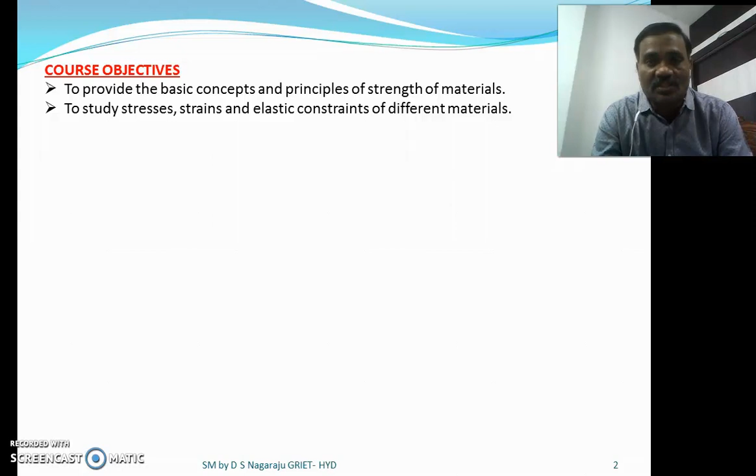That means the concept of stress, strain and elastic constants we are going to see for different materials. Each material has its own mechanical properties. So in strength of materials we mainly deal with the mechanical properties of materials.

If you apply a force or load on any component or material, we study what changes occur and what happens to that component. That is mainly related to stresses, strains and the constants related to the materials.

Third objective: to gain knowledge about shear stress and bending moment of different beams subjected to various loads. So if you go through the second unit of the subject, we are going to see the beams.

What are the types of beams and what types of loads you apply, and after application of the load what happens to the beam, at each point what is the shear stress and bending moment for different beams and different loads we are going to study. That is the objective - studying stress, strains, shear stress and bending moment for beams.

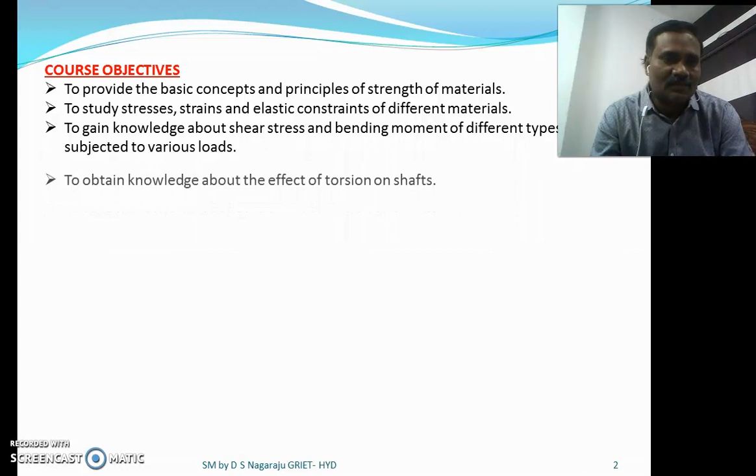Fourth one: to obtain knowledge about the effect of torsion on shafts. Stress strain is the basic terminology in the first unit, and types of beams and application of different types of loads.

We are going to do shear stress and bending moment diagrams in the second unit. The fourth objective is the effect of torsion - what is torsion, and if you apply a twisting or turning moment to the shaft, what happens and what effect you get.

The fifth one is to understand the flexural and shear stress concepts for different materials and shapes of structures. That means you are applying a load on a beam, and the beam section can have different sections.

The section may be an I section or T section. Each layer of the section has flexural stress, which is nothing but bending stress, and shear stress also. We are going to analyze the shear stress and bending stresses for different sections of the structures.

So that is the course objectives - I have framed my syllabus of strength of materials in such a manner that I am going to give all these basic concepts. That is the objectives. Now what are the outcomes?

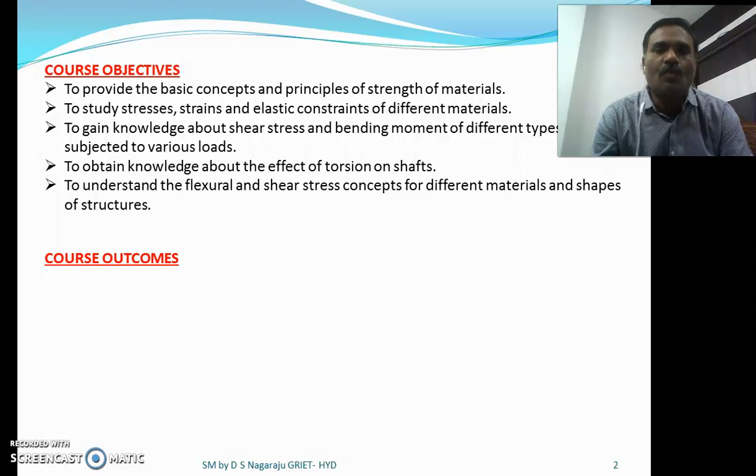As a student, after completion of the syllabus, what you are going to gain or the knowledge you gain is nothing but the course outcomes.

At the end of the course, the student shall be able to understand the theory of elasticity, including strain displacement and Hooke's law relationships; analyze the shear stress and bending moment diagrams with various types of loads; and calculate the slope and deflection of the beam subjected to transverse load - that is also related to beams.

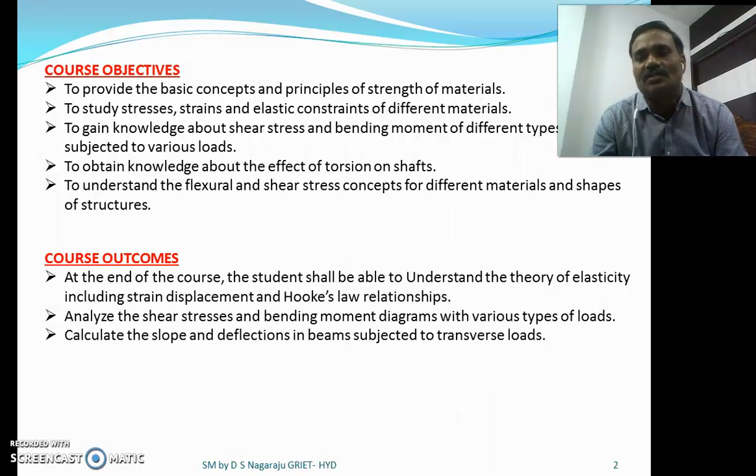Not only shear stress and bending moment, but also we are going to see slope and deflection. You are going to calculate that one.

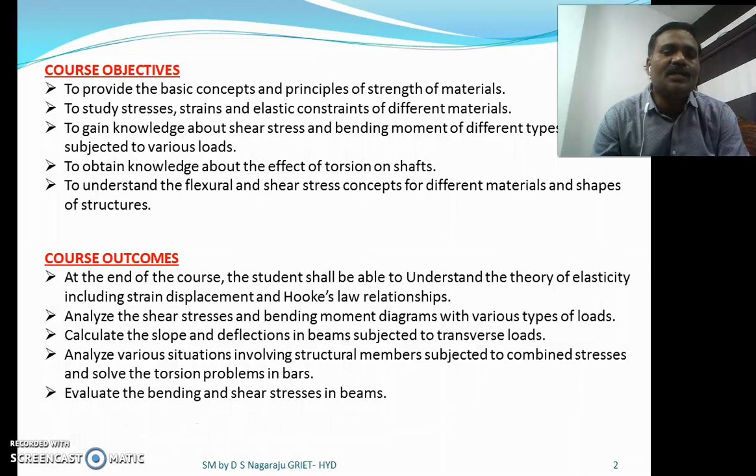Analyze various situations involving structural members subject to combined stresses and solve the torsion problems in the bars. Next, evaluate the bending and shear stresses in the beams, which we have already seen.

So that is the course outcomes and objectives of the subject. Now we are going to see the introduction of the subject. So what is the introduction of the subject? In the introduction to strength of materials, we are going to see about...

Strength of materials is also called the mechanics of solids. That means it is related only with solids. The mechanics of other materials like fluids and gases are studied in fluid mechanics. But in strength of materials, we deal only with solid materials. That's why this subject is also called the mechanics of solids.

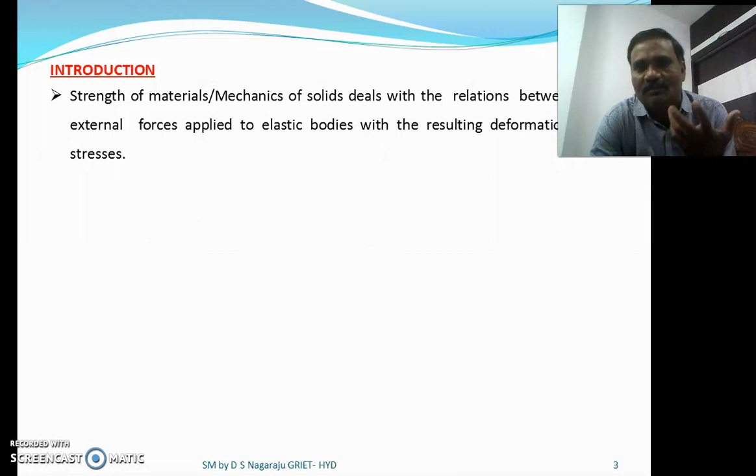Mechanics is nothing but, if you apply a force or a load on a member - that is a solid member - what is going to happen, and what is the resistance offered by that solid material, you are going to see that.

Next, in the design of structures and machines, the application of principles of strength of materials is necessary. Suppose you want to design any structure or machine, it is a combination of various parts. So finally, if you apply a load at one component, it is going to be transmitted or transferred to the other components, meaning it is going to affect all the remaining components.

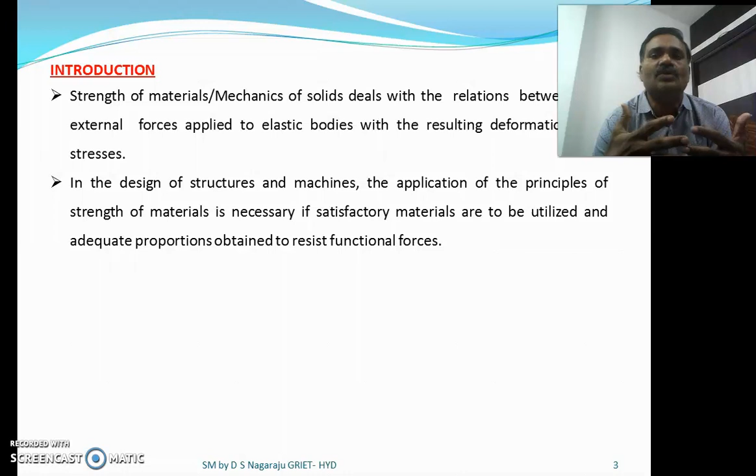The application of the principles of strength of materials is necessary if satisfactory materials are to be utilized and adequate proportions obtained to resist the functional forces - that means without deformation. You need to design in such a way that there should not be any permanent deformation in the structural member. If permanent deformation takes place, then the machine is no use at all.

Forces are produced by the action of - that means you come across all these terms in engineering mechanics - gravity, acceleration, impacts of moving parts, gases and fluids under pressure, transmission of mechanical power, etc.

In order to analyze the stresses and deflection of a body, the magnitude, direction, and point of application of the forces acting on the body must be known. Information given in the mechanics section provides the basis for evaluating the force systems. You come across different types of force systems.

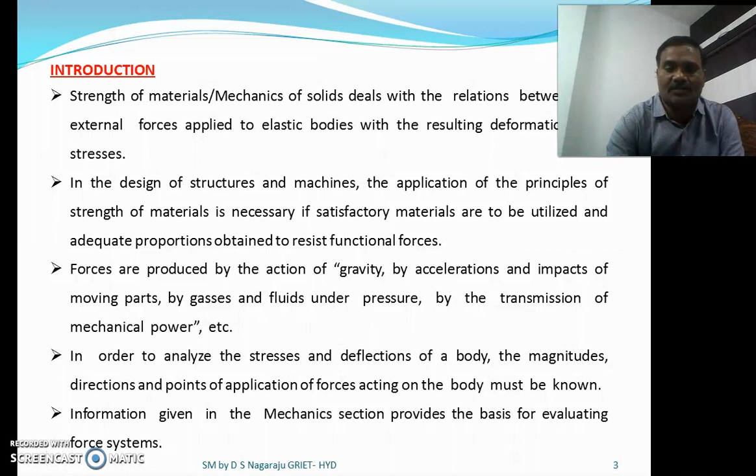Next is unit 1. Whatever we are going to study here in unit 1 is mainly related with the terminology related to simple stresses and strains. In detail, this is the concept of stresses and strains.

Stresses and strains may be linear, lateral, shear stress, thermal, and volumetric strain may take place. Next is Hooke's law, Poisson's ratio - so we are going to come across all these terms - modulus of elasticity, modulus of rigidity, bulk modulus.

Next important one is the stress-strain diagram for ductile and brittle materials. In the stress-strain diagrams, you should know what is proof stress, true stress and strain, various strengths of materials - that is yield strength, ultimate tensile strength, factor of safety (FOS), strain energy, gradually applied, sudden and impact loads. What is the strain energy there?

And the concept of stress state, relationship between elastic constants, axial forces, stresses and strains in determinate and indeterminate bars and composite bars, bars under axial loads and self weight - that means objective 2 is going to be fulfilled here. After completion of the syllabus, you will know the basic terminologies and basic applications related with strength of materials.

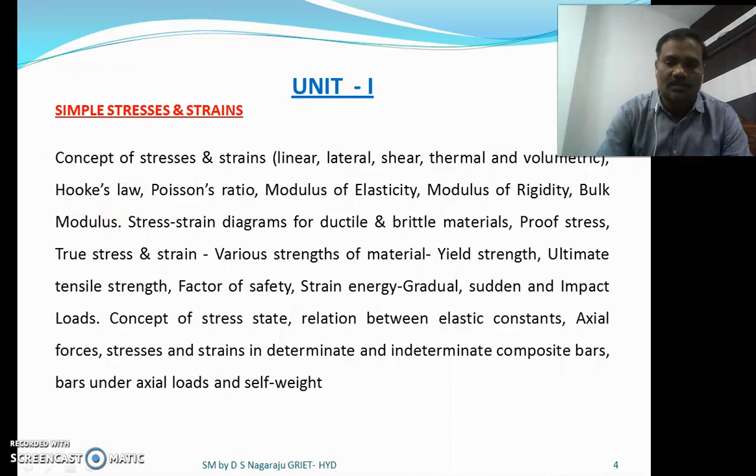Now, after this introduction and the terminology related to that, we are going to move to a very important topic - the mechanical properties of the materials. In strength of materials, we are going to see the mechanical properties of the materials.

A mechanical component, which is a solid, is going to be subjected to various types of loads. What will be the effect of the load or force on various components, and which property is going to be influenced by the application of the load? Various applications include drawing into wires or making metal into sheets. Some materials may withstand scratches on the surface - that is surface hardness - so that is going to be studied.

Strength of material mainly focuses on the application of various types of loads and forces and their effect on various components. For that we are going to see the mechanical properties. Similarly in metallurgy, we study metallurgical properties, that means the grain structure, and similarly there are chemical properties, but we are not going to deal with metallurgical, chemical or other properties. We are going to see only the mechanical properties.

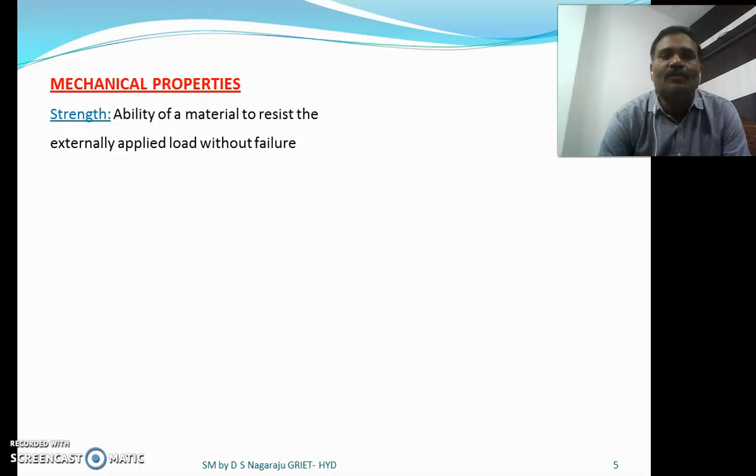The first one is strength. Strength is the ability of a material to resist the externally applied load without failure. That means if you apply a load, indirectly the force is applied, then there is a deformation. Deformation is the change in the dimensions of the component. If you keep increasing the load, there is a chance of failure of the component - it may break down into pieces. So that ability to withstand the externally applied load is the strength.

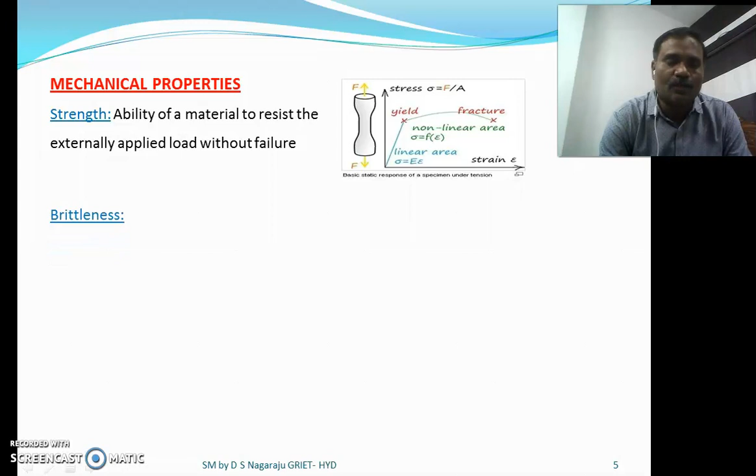The next property is brittleness, the tendency of a material to fracture or fail upon the application of a relatively small amount of force - that is nothing but impact or shock. Examples are cast iron, glass and ceramic. If you drop the glass, it is going to fail completely. That property in ceramic causes it to fail completely - that is the brittle property.

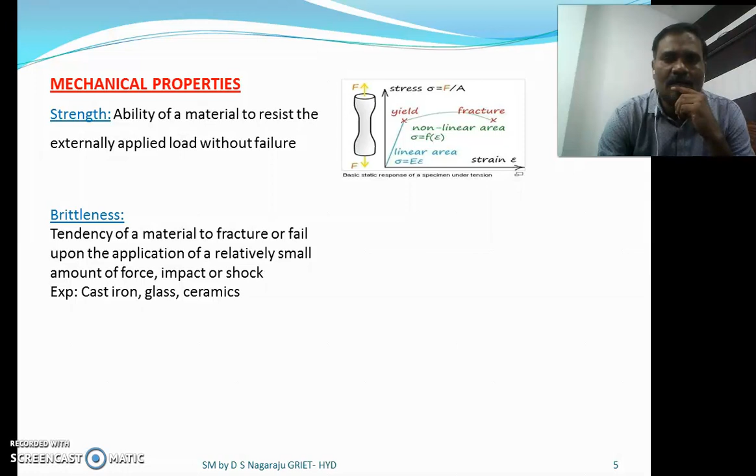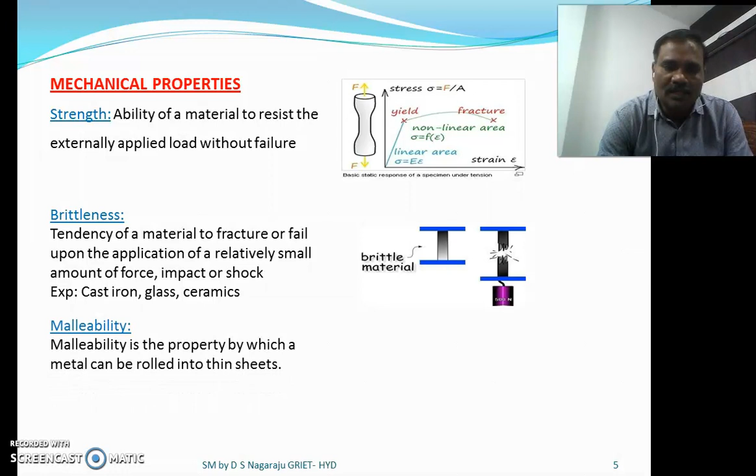Malleability is the property by which a metal can be rolled into thin sheets. Suppose if you want to make thin sheets like this, the solid or material must have the property of malleability. The materials are steel, so steel plates or sheets are going to be formed - that is the property.

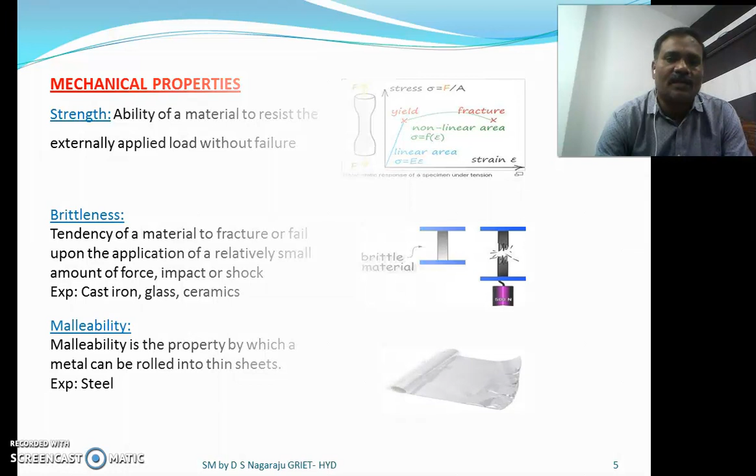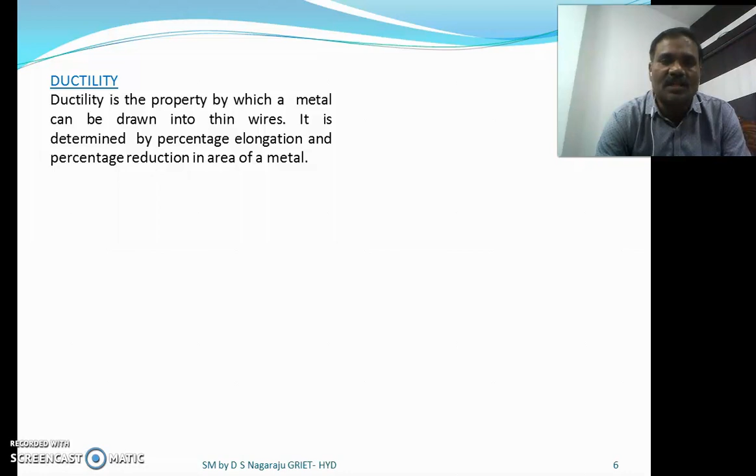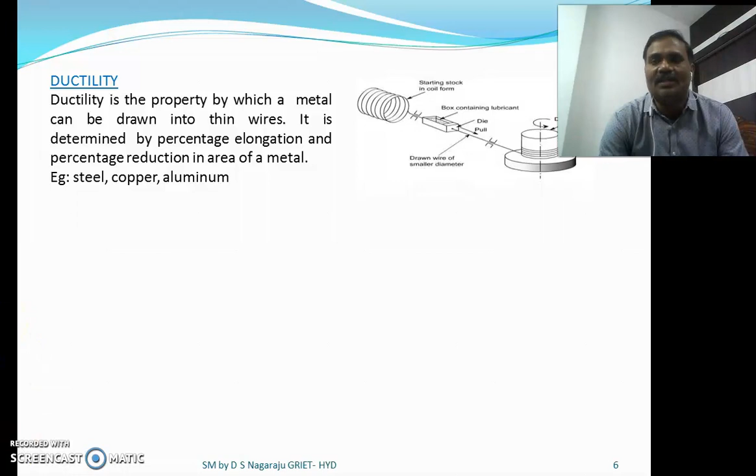The next one is ductility. Ductility is the property by which a metal can be drawn into thin wires. It is determined by percentage elongation and percentage reduction in the area of the material. Examples are steel, copper and aluminum, which may be drawn into wires. So that means if it is a brittle material, you can't draw them into wires or make them into plates. If you want to make a material into sheets, it must have the malleability property, and if you want to make it into thin wires, it should have the property of ductility.

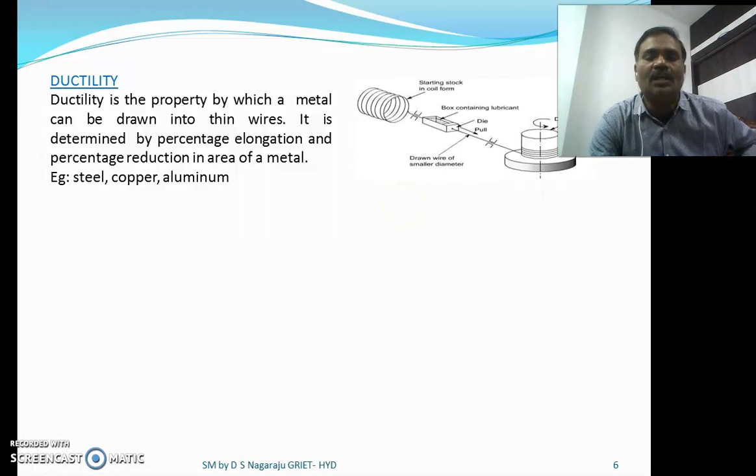Now you can see it is going to be drawn, and it is going to be wound. That is the ductility property - the property by which a metal can be drawn into thin wires is the ductility. The next one is hardness.

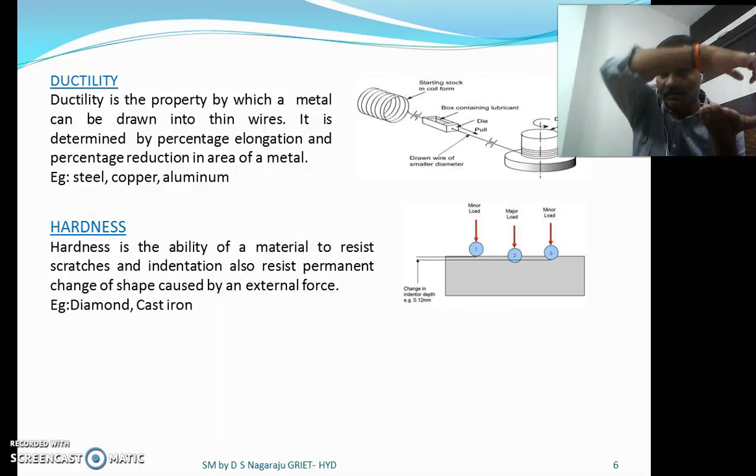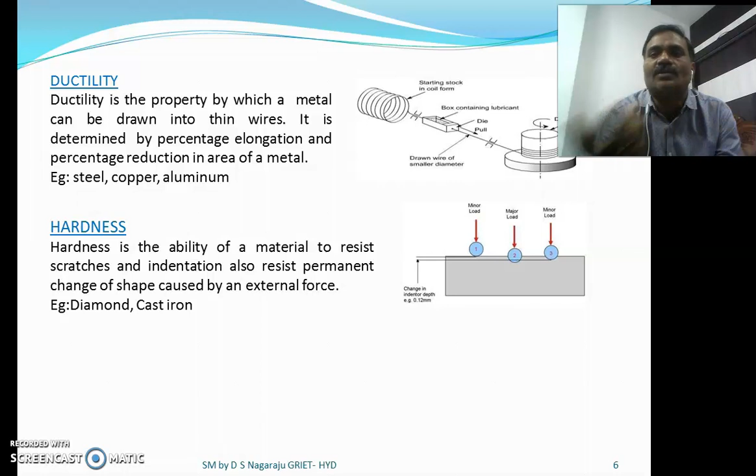Hardness is the ability of a material to resist scratches and indentation, and also to resist permanent change of shape caused by external force. Examples are diamond and cast iron - that is surface hardness. You can come across so many applications like this: a load is put on a plate for some time, or a load may move from one place to another on the surface, and there should not be any scratches formed. If it is continuously forming scratches, the shape is going to change, and the intended purpose of the component will not be solved. So that is the hardness - the ability of the material.